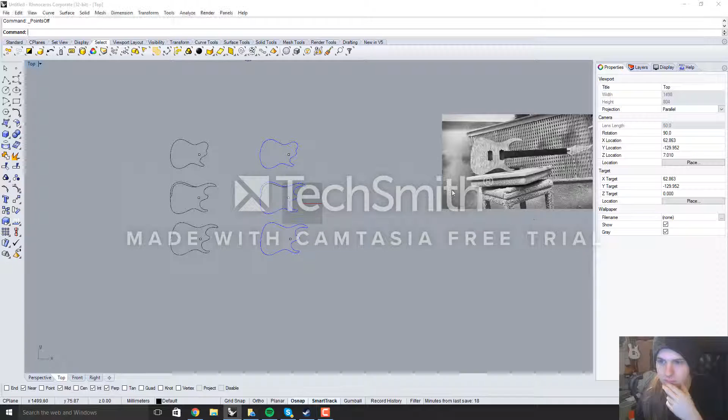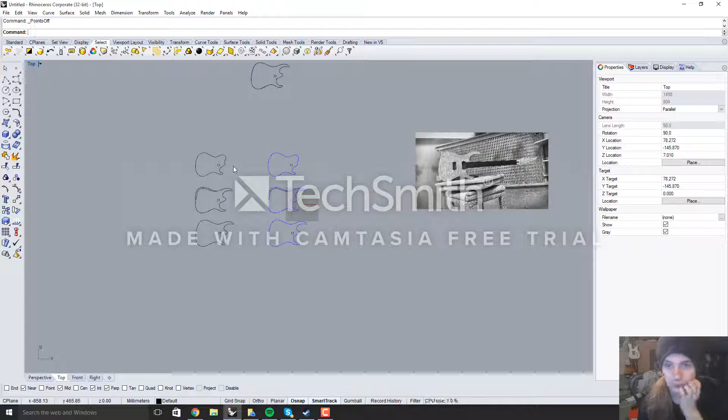Hey guys, so I wanted to do a quick video on making the basic guitar outline or shape. There are so many ways to do it in Rhino because of the amount of tools available, but there seems to be one way that just works better than the rest. That's with the control point curve.

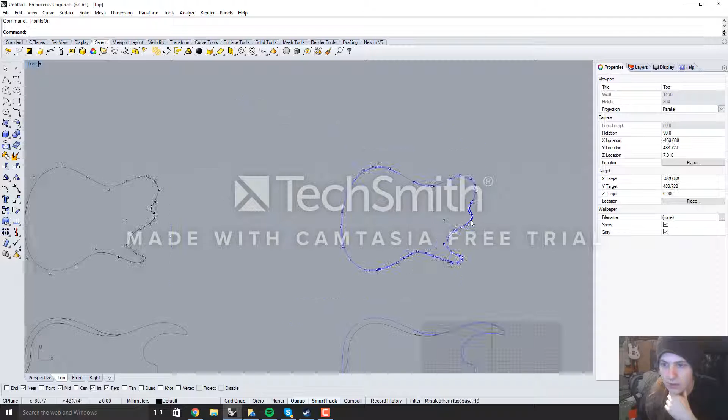I've got a couple of examples of good and bad versions of the same shape. This one you can see there's minimal control points, whereas in this one you can see there's a lot. This is really important for when it comes to doing 3D carves on the back of the guitar, and even if you're wanting to do 3D carves on the front, because you need to manipulate these control points during those steps, and you can't do that if you've got a bunch of them.

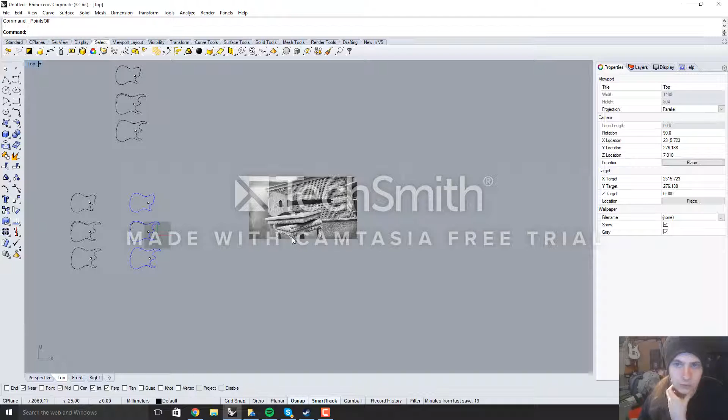So I wanted to do a quick demonstration of basically how I go about tracing a guitar. This isn't something I recommend if you're wanting to build - I highly recommend designing your own - but of course tracing a guitar for inspiration is absolutely fine as long as you manipulate it in some way.

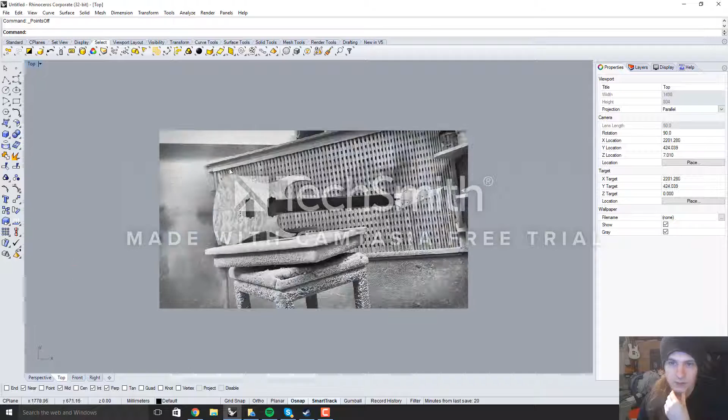So to get a picture to trace around into Rhino, you want to go to the View button, Background Bitmap, and if you click Place, it will come up with a finder that you can just select the image and drop it into your Rhino file.

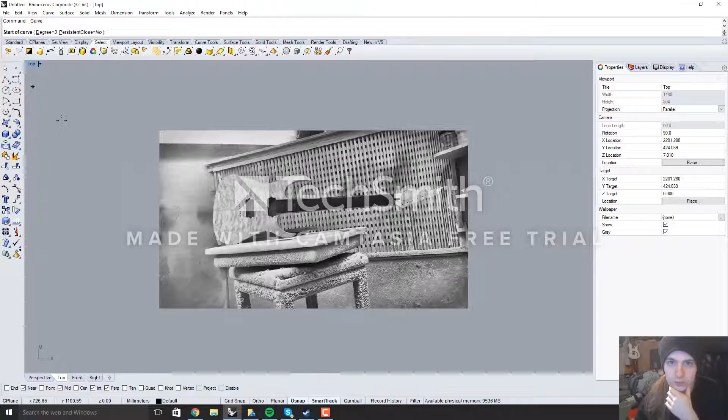I'm going to start with the control point curve. This is basically the only tool you need except for the center line, which is important. The only real rules are: one, keep the amount of control points to an absolute minimum - if you don't need one in a certain place, don't put one. And two, whenever I see a change in the curve or a different radius, I'll place 3 points, one at the start, one at the middle of the curve, and one at the end.

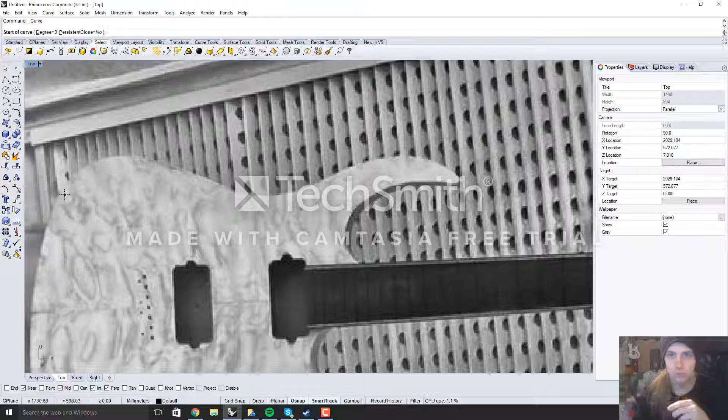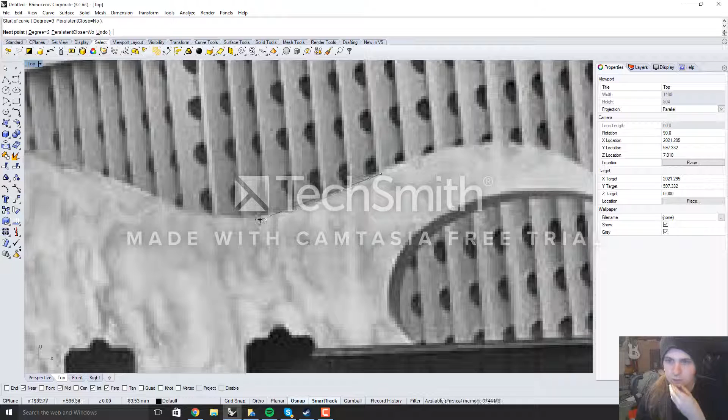So if we're looking at the top, what I'm basically trying to highlight here, you'll see that there's 3 curves - you've got this one, then it goes down into another curve, and then it comes back up into another curve. So for a section like this, I would have one at the start, one at the middle, and one at the end, and I basically just follow that all the way around the guitar. So we've already got one at the start of this curve, middle, end, middle, end, middle, end, and you just continue.

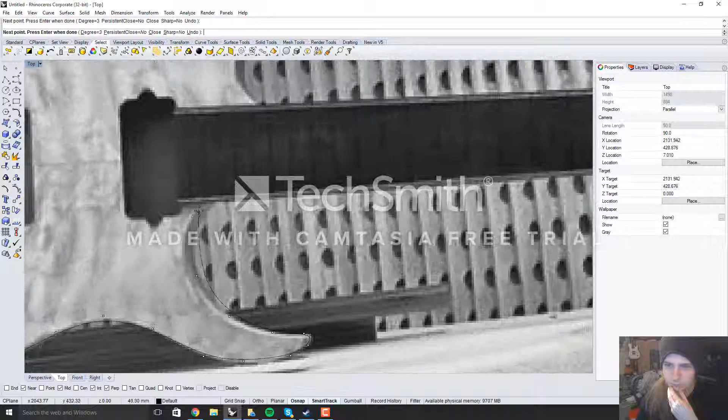You want, again, as little as possible. I know it's difficult around the horns though, so one extra there isn't going to really matter. I'm just going to make a random shape that I can use later to create my neck joint.

And I know this looks like shit right now, but I'm going to fix that. So I've just got a very basic shape here. Now you can either press F10 or come down to points on, and we can start dragging these points around the guitar.

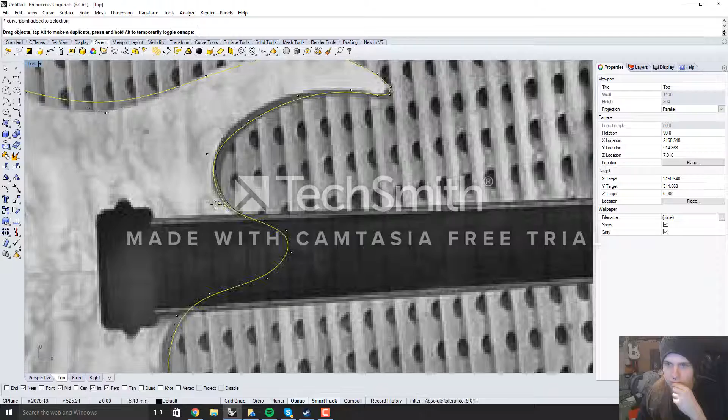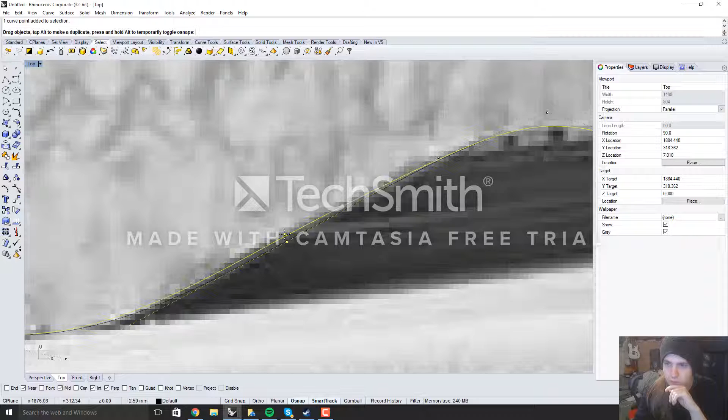You probably will need to go around the guitar a couple times doing this, as you can see when you change one control point or drag it, it'll affect more than just that small section - it will start affecting the control point before it. So you just got to keep going around the guitar, refining it, getting it as close as you want.

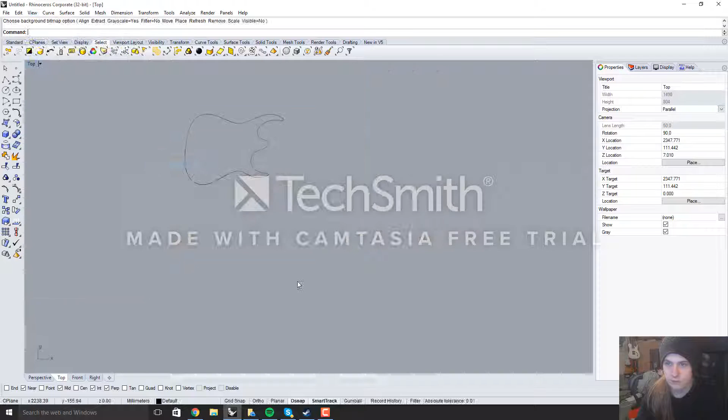And that to me looks good, so I'm going to turn my points off. I'm going to click View, Background Bitmap, Hide. And there we have it - basic guitar outline with very, very few points. One thing I will go and do quickly is turn the background back on.

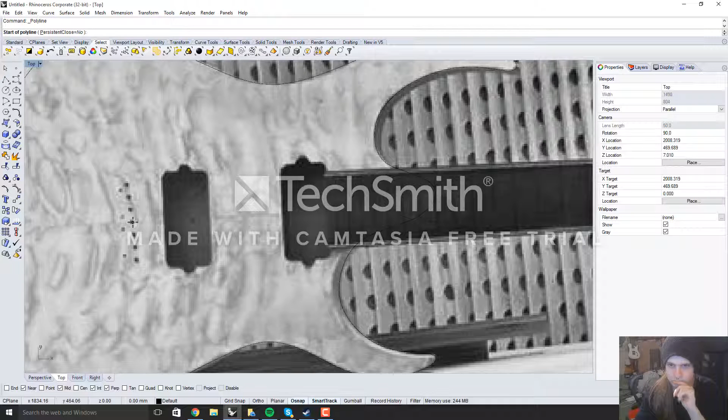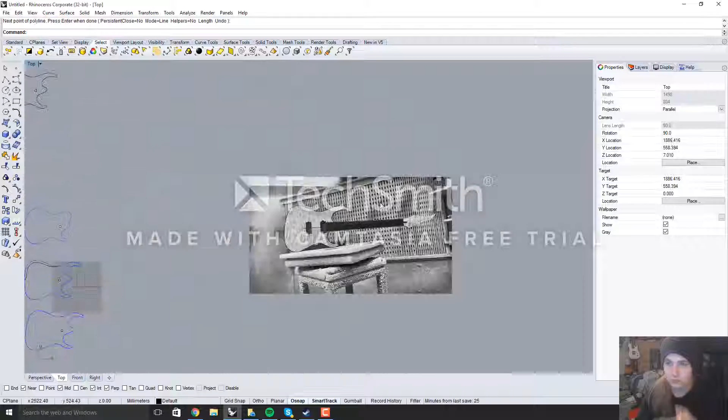And I'm gonna try and find a center line from this. So as it's a 7 string, we can go from the middle string hole, and we can also use the center line on the guitar. We could go... yeah, I'm just gonna pick roughly the center of this. So we've got a pretty good idea for the center line now.

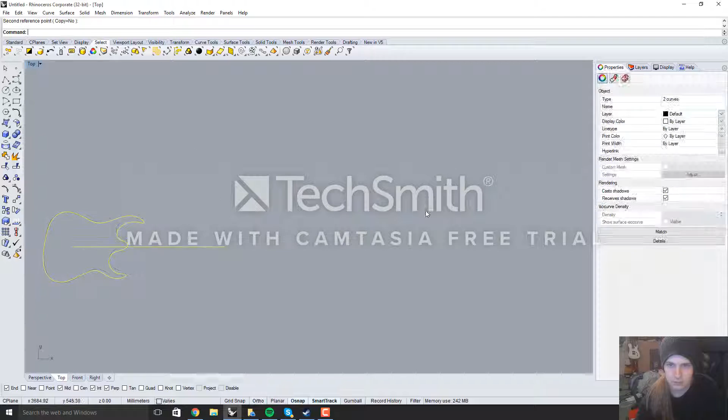I can then once again hide the background. Now I'm going to do a quick rotate command - make sure you're selecting the end of this and the end of this - so now I can make it horizontal. So there you go, there's a super quick way and good way of basically creating the outline of a guitar.

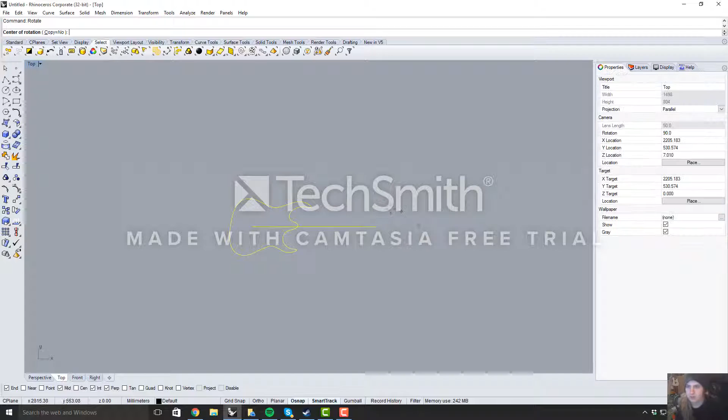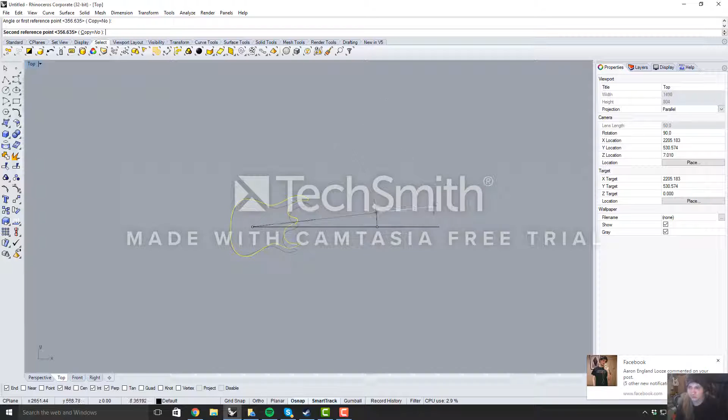Just a couple quick notes before I go. For the rotating, if you want to make sure it's a perfect 90 degrees, you can either select ortho down here and it will automatically snap to the next 90 degree, or if you want to turn that off, you can toggle it on and off with the shift key. So say I want to move this up, hold shift, and here we go, perfect 90 degrees.

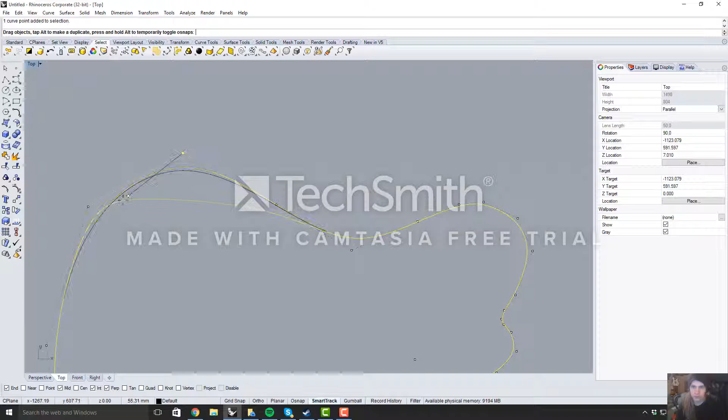The other thing was, when it comes to the control points, let me just turn these on quickly - if you're having issues with them snapping to other lines or other bits, you can hold Alt and it will basically make it completely free to move around without snapping or anything.